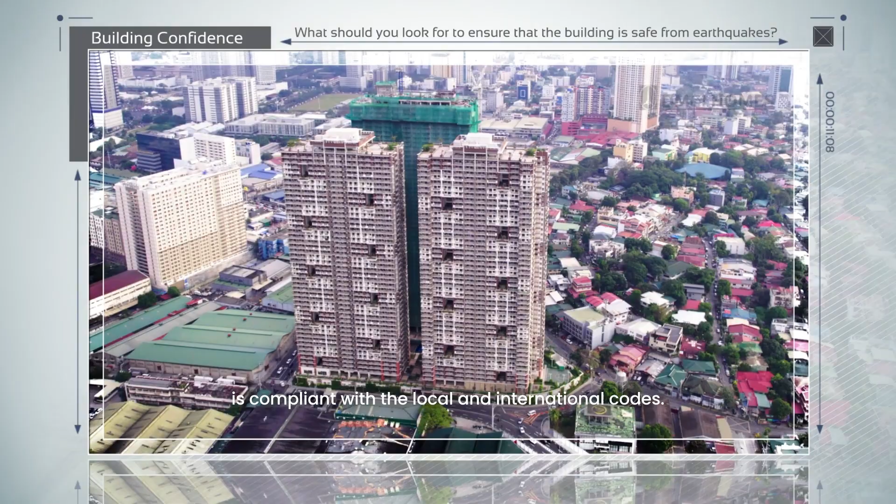The buyer should ensure that the property is designed by a reputable licensed structural engineer, and at the same time, dapat built din siya ng isang experienced and licensed property developer to guarantee that the structure is compliant with the local and international code. How high is the magnitude yung kaya ng residential building?

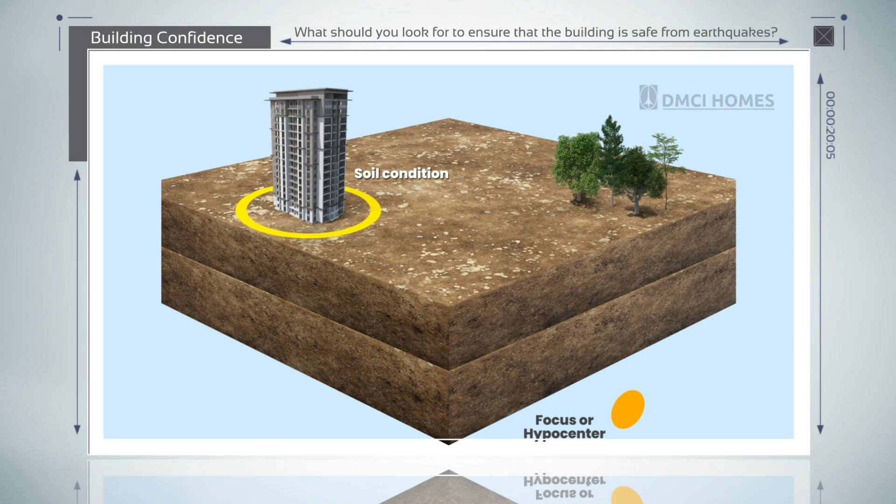So, regardless if it's a high-rise or a mid-rise structure, parehas naman sila maapektuhan ng earthquake. Ngayon, yung potential ground acceleration movement shall be dependent dun sa soil condition, yung fault type, saka yung distance niya mula dun sa fault line. As long as it is compliant dun sa code provision, it can be deemed as safe.

What's the National Building Code of the Philippines? That's PD 1096. Up to now, it's still the prevailing national code of the Philippines. Yung purpose of the National Building Code, number one is to safeguard life, property, yung personal wellness ng mga tao. And of course, to provide yung minimum requirements for us to be able to regulate and control yung design.

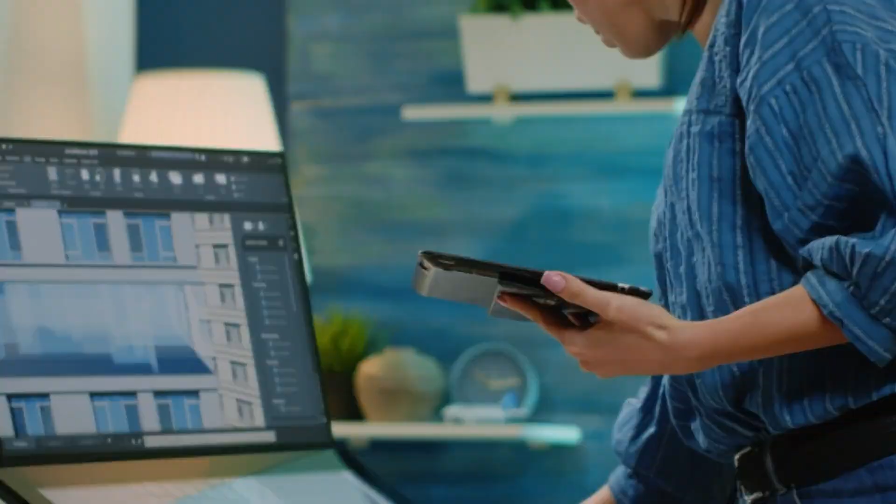What is the difference between the NBCP and NSCP? Yung National Building Code embraces everything. May maliit na part doon about the structural, the NSCP. The NSCP is the main referral code used in structural design of a building and even on vertical structures here in the Philippines. It contains provision to seismic resistant structures.

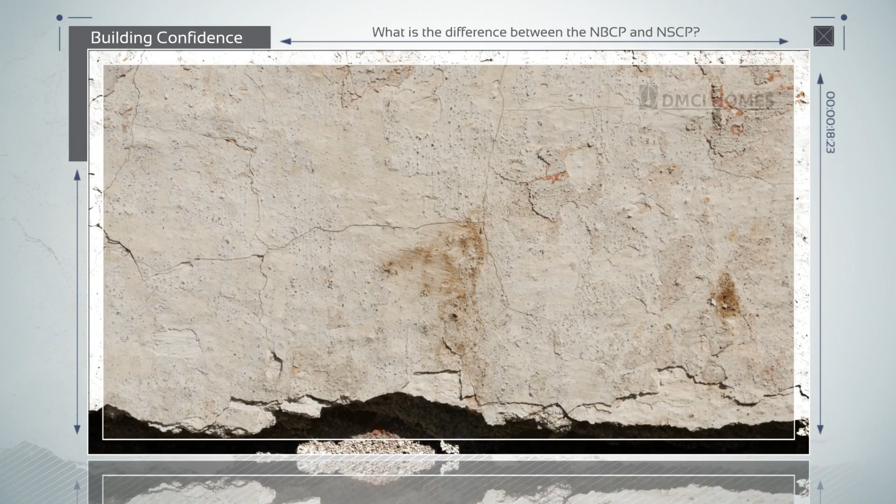It does not mean na zero damage yung mangyayari once na ma-hit siya ng earthquake. So the NSCP anticipates that under severe earthquake, structural damages may occur, but these damages should not lose life and property. So yung seismic resistant design, it is not applied to all members or components ng isang structure. It is basically applied to select members that act as part of the main lateral resisting system ng isang structure.

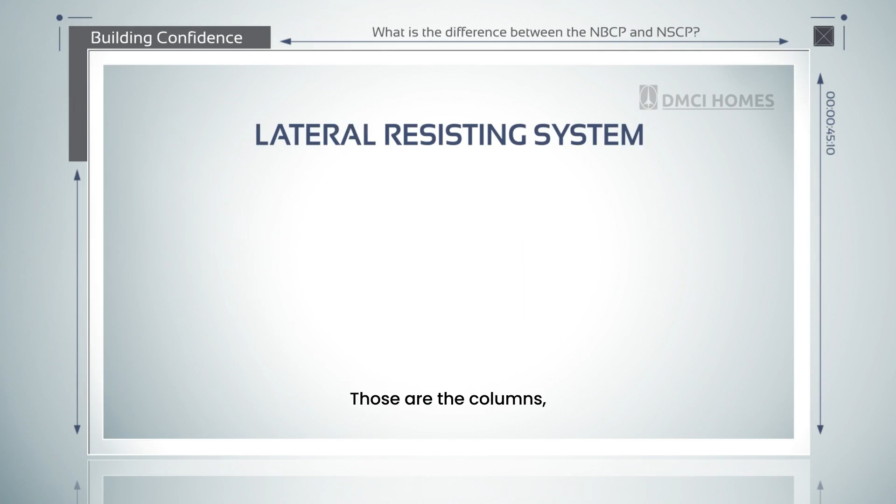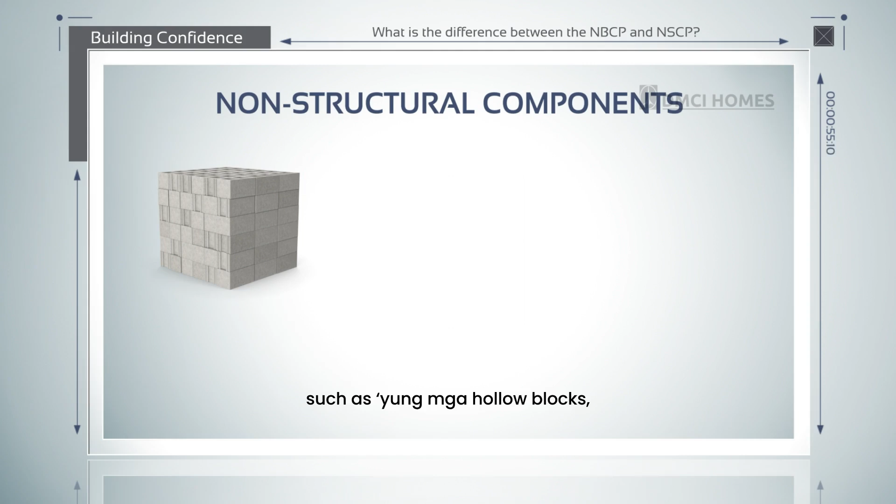Ano ba yung mga lateral resisting system? So those are the columns, shear walls, beams, girders, and slabs. The non-structural components, such as yung mga hollow blocks, yung mga partitions, yung mga ceilings, yung mga floor and wall tiles, glass windows, and other similar building components, hindi siya part ng lateral resisting system. So therefore, they are not earthquake resistant.

Then we start off with looking at the architectural plans. That's very important that we get the geotechnical investigation or soil report early. Pag yung structural system na yun is one of those listed in the NSCP, then pwede kami to just use yung tinatawag nilang prescriptive based design. Linear analysis lang yun. If it doesn't fall under those listed in the code, then we have to do non-linear analysis. Dun pumapasok naman yung PBD. What's the difference between code-based against performance-based design?

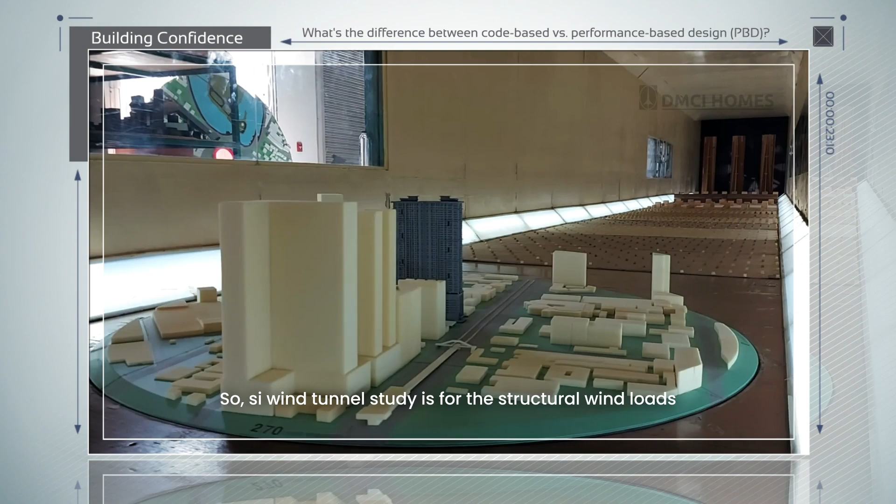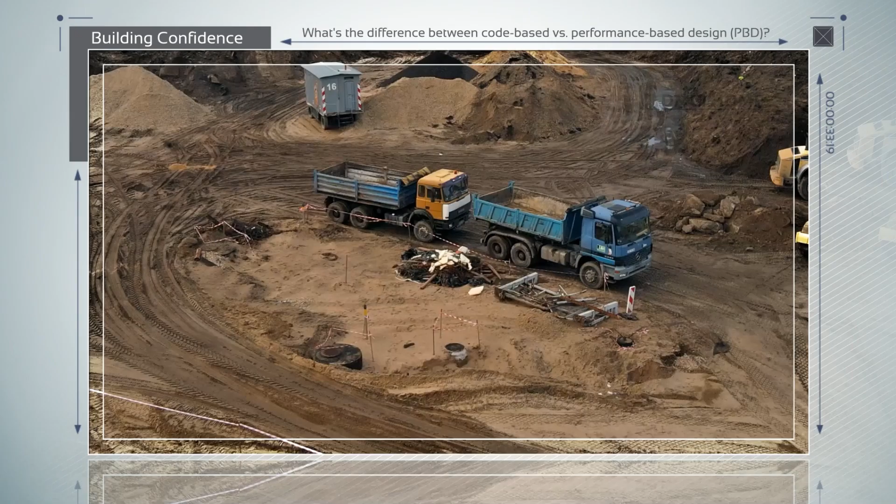Also, we tap international consultants such as AIT Solutions para mag-conduct sila ng peer review naman. Again, ang product nun is not only code compliant but also optimize yung product na mapoproduce natin.

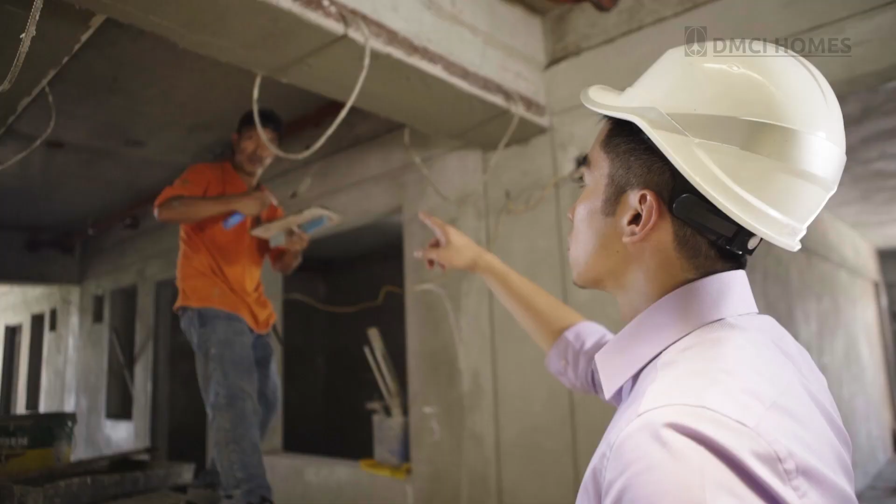DMCI Homes strictly follows the prevailing building and design codes. Key factors that make DMCI Homes condominiums safer are solid foundations, flexible designs, and high-quality materials. These elements work together to help buildings absorb and withstand the shock of an earthquake. After an earthquake occurs, thorough inspections are conducted to ensure that the buildings are safe for occupancy. This process can be thought of as a comprehensive health check for the structure.

Quality and safety are highly prioritized in DMCI Homes. Built with meticulous planning and adherence to strict codes, our buildings are designed to be safe against earthquakes and other natural calamities.